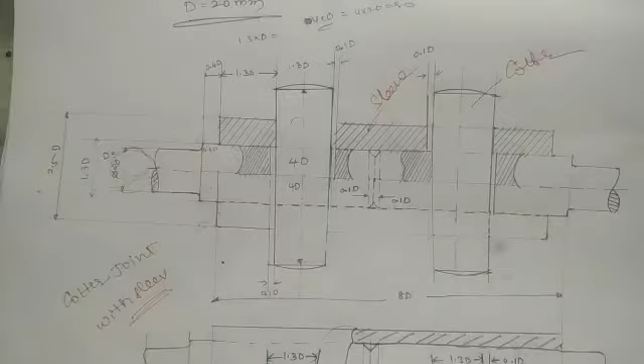This is the simplest of all Cotter joints used for fastening two circular rods, meaning the joining of two circular rods. This is the sleeve, these two are Cotters, and these two are circular rods.

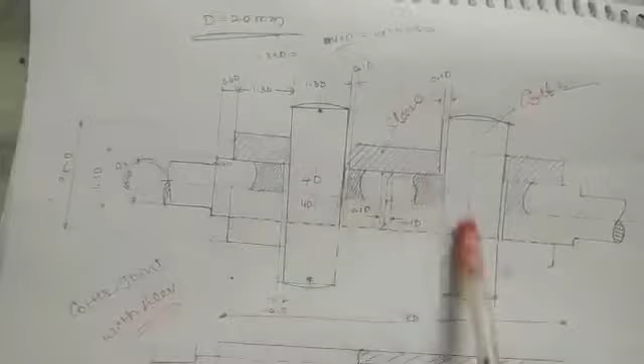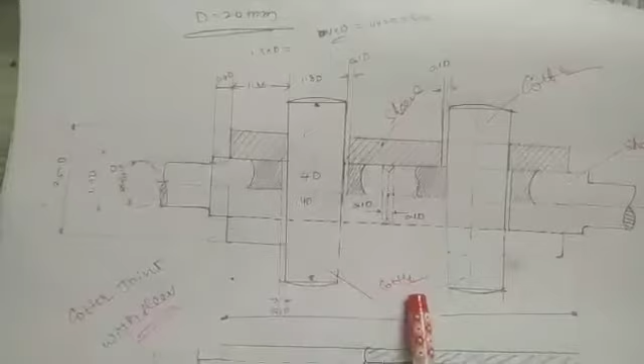In this Cotter joint with sleeve, we use two shafts, one sleeve, and two Cotters. The main purpose of the Cotter joint with sleeve is fastening two circular rods with the help of Cotters.

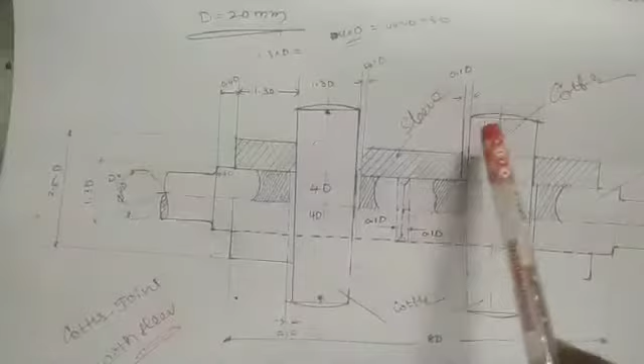Please see the diagram. These are all standard dimensions, meaning standard formulas. The rod diameter is D. From here to here is 1.3 into D. The sleeve outside diameter is 2.5 into D. The Cotter height equals 4 into D. The Cotter width at the top is 1.3 into D. The clearance dimension is 0.1 into D.

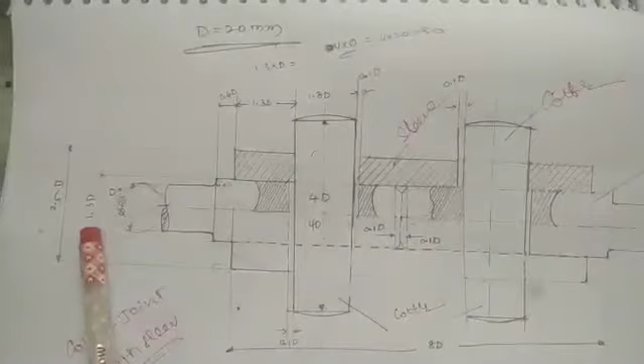In this case, I am taking D equal to 20 mm. Substitute this D value into all the formulas. So D equals 20 mm. This is 1.3 into D: 1.3 into 20 equals 26 mm. This is 2.5 into D: 2.5 into 20 equals 50 mm.

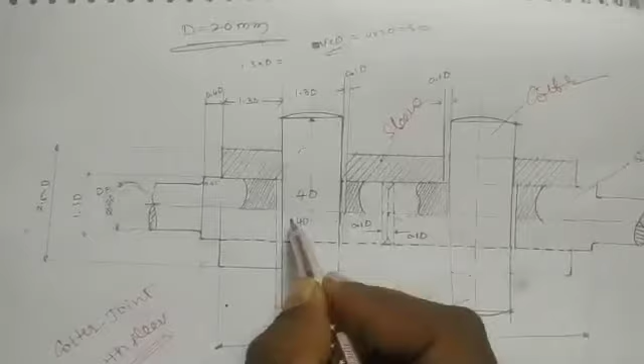But very important is how we start the diagram - that is very important. First of all, draw one center axis, which is very important, because without the center axis we can't do anything. After completing this, draw the 1.3 into D dimension line.

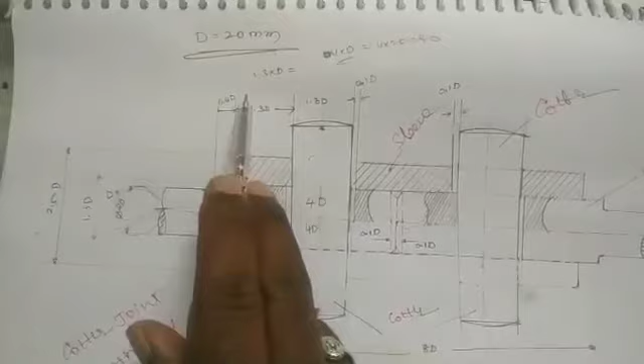After finishing this, take 0.4 into D dimension: 0.4 into 20 equals 8 mm. Take 8 mm from this point at the top, and again take 8 mm at the bottom. This is the symmetrical section.

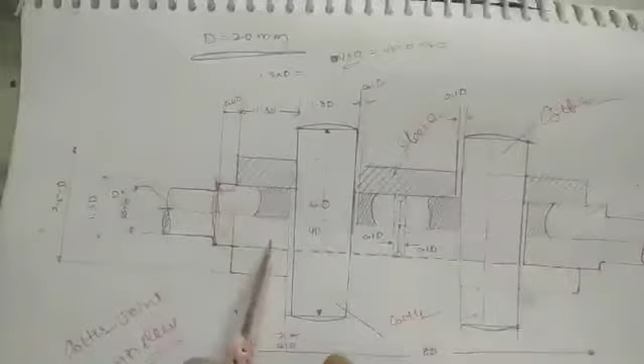After completing this, draw the sleeve portion at the top and bottom. The distance from here to here is 1.3 into D, so 1.3 into 20 mm equals 26 mm. Draw this portion.

Again take 1.3 into D, that means 1.3 into 20 equals 2.6 centimeters or 26 mm, for the Cotter portion. There is some taper section. Take 2 mm from this point and draw like this - some clearance is there.

The clearance dimension is 0.1 into D, that means 2 mm: 0.1 into 20 equals 2 mm. Take the clearance distance as 2 mm at the bottom and top.

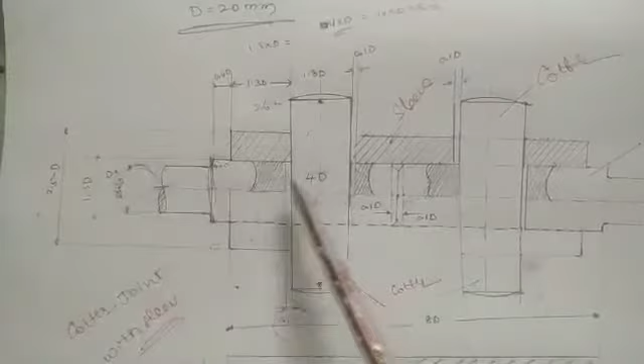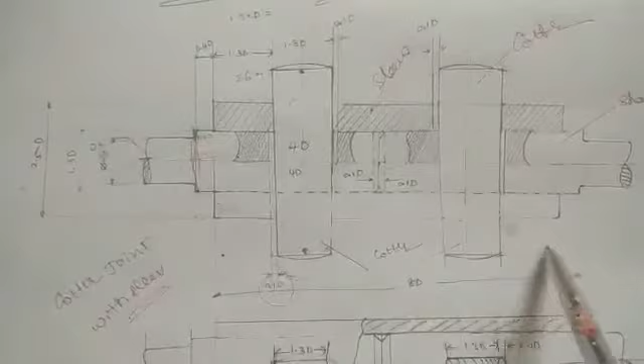In a similar way, draw the Cotter and this portion on the right side also. But very important is the total distance - before drawing this portion, you have to draw the total length: 8 into D, so 8 into 20 equals 160 mm or 16 centimeters.

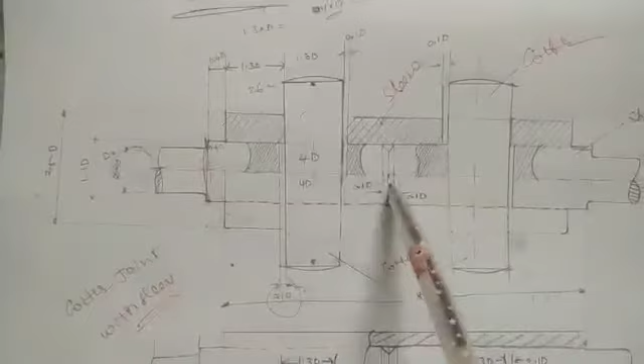Then you have to draw this portion. After completing this portion, draw this one, draw this one, draw this one. After completing this portion, draw the Cotter section, and after completing the two Cotter portions, draw the engagement of shaft portion.

This is 0.1 into D, then this is 0.1 into D also. This is the complete diagram of the Cotter joint with sleeve.

Very important point: you should also draw the top view. Project this one, project this one, project this one. This is very simple and easy to draw. Thank you. Draw the one center axis.

This is the center axis of the object in the diagram. Then draw one vertical line. The dimension of the vertical line is 1.3 into D, so D equals 20 mm. After completing that, draw one horizontal line.

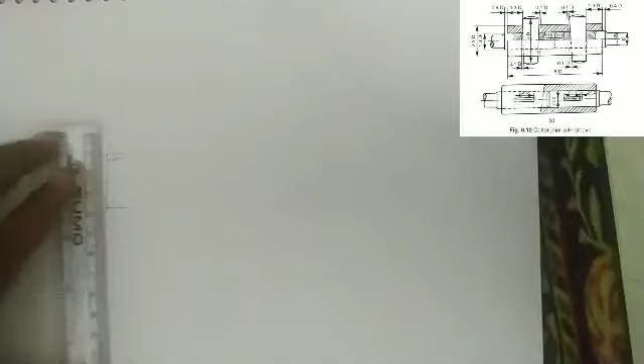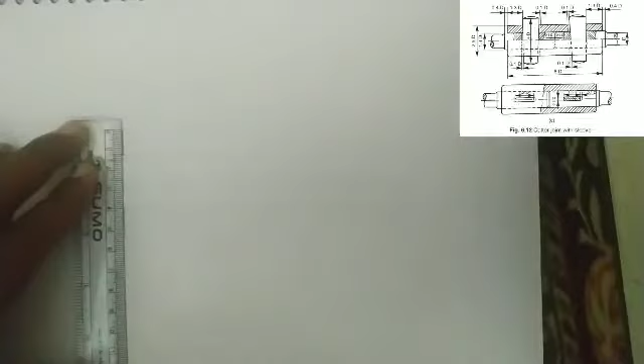This is the 0.4 into D dimension - substitute the D value into that formula. Then this is 1.3 into D. After completing these two lines, draw the 2.5 into D dimension. Please see the procedure how to draw this: 2.5 into D equals 20 mm, then 50. Take 25 mm above the center axis and again take 25 mm below the center axis. This is the symmetrical section.

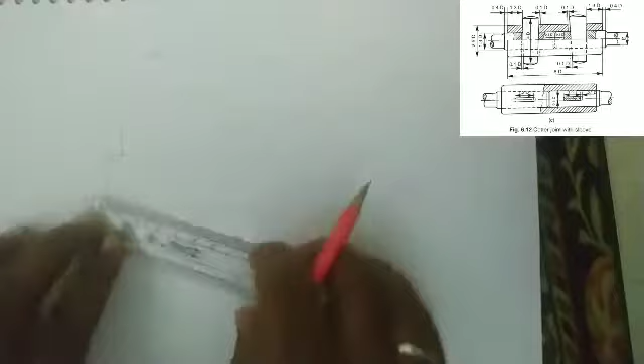After completing this, take the 1.3 into D formula: 1.3 into D equals 20, then 26 mm. Measure 26 mm with the help of a square scale. Mark one point - 26 mm, so this is 26 mm. Draw one vertical line at the top and bottom.

Please see the procedure how to draw the cotter joint with the sleeve. This is very easy to draw.

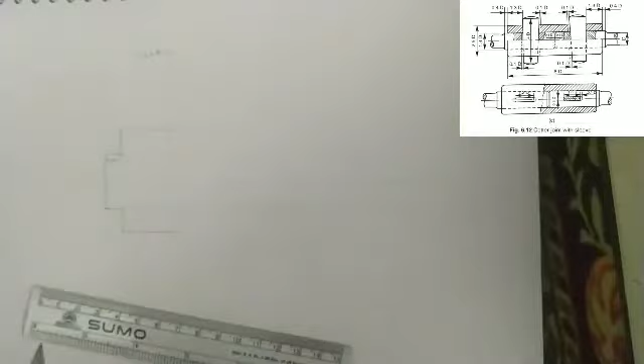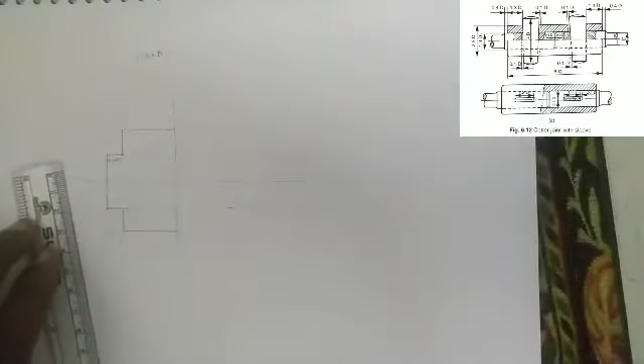Take 1.3 into D dimension, that means 26 mm, for the cotter portion. So please take 1.3 into 20 equal to 26 mm at the top and bottom. Draw one vertical line. So this is the cotter portion. Please see the procedure how to draw this cotter portion.

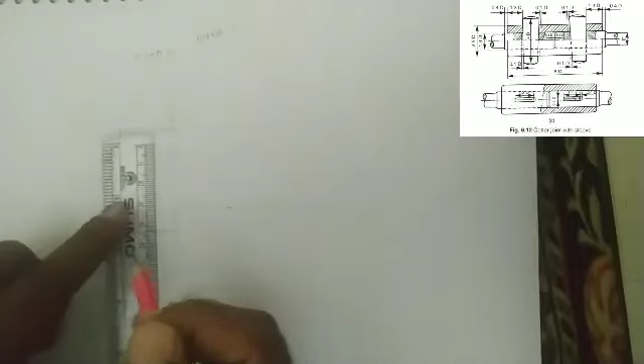The height of cotter equal to 4 into D. We know that D equal to 20 mm. So please substitute instead of D equal to 20. Then 4 into 20 equal to 80 mm. So the height of cotter equal to 80 mm. Please take 40 mm above the center axis, then again take 40 mm below the center axis.

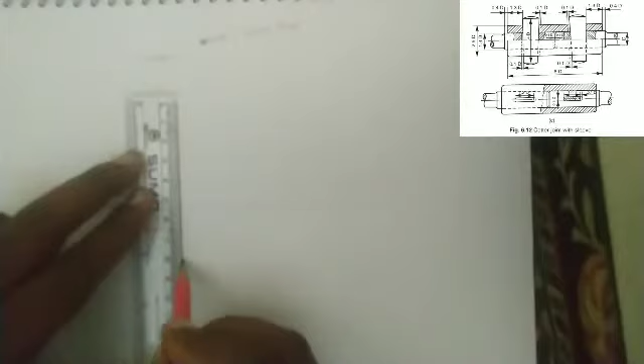Then this is the 4D, 4D means 80. So above the axis 40, then below the axis 40. So this is the symmetrical section.

From that line to this line, the distance is 1.3 into D, that means 26 mm. Then D equal to 20 mm, the diameter of the rod equal to 20 mm, or shaft.

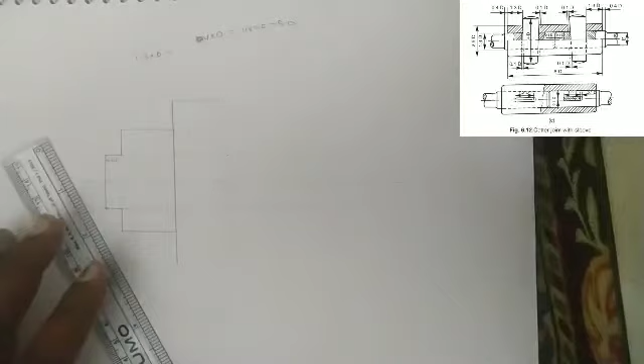Please see the procedure. The cotter has some taper section, so please take 2 mm and draw like this.

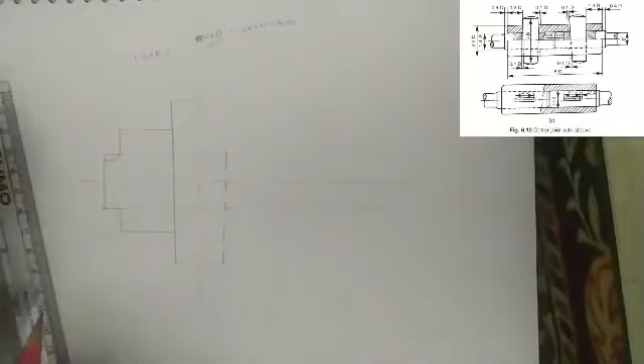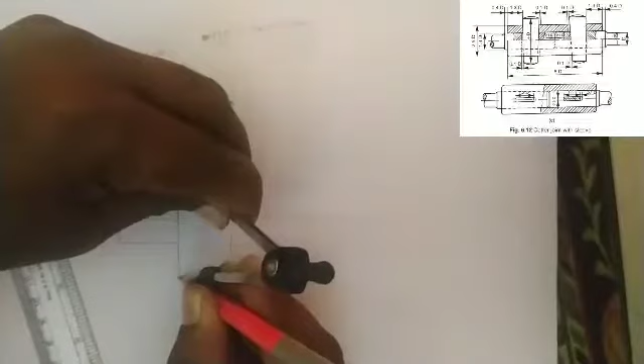Draw the arcs with the help of compass. Please take some radius as per your convenience, and draw the arcs like this.

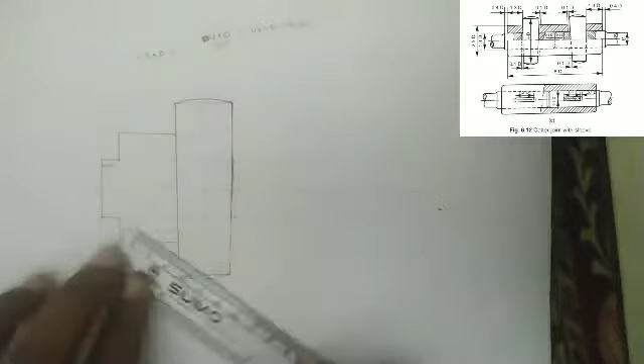Please draw some clearance, beside the cotters. Please take 2 mm and draw the clearance.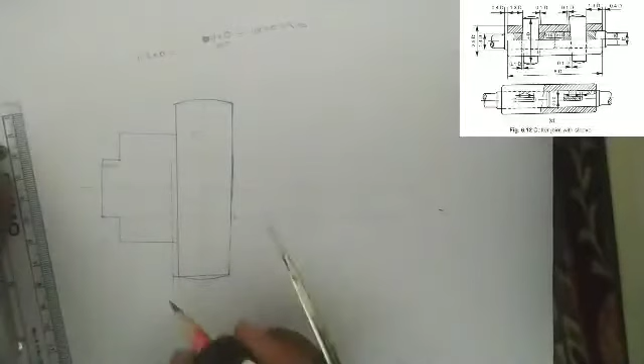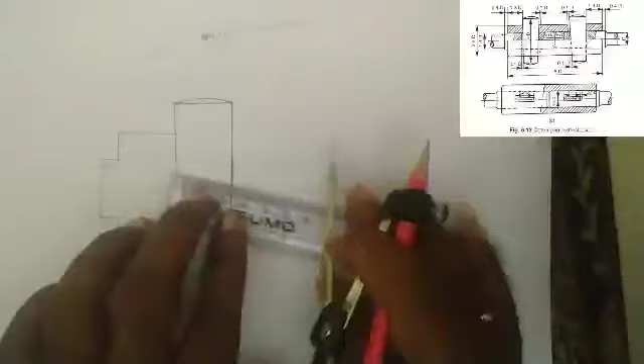The clearance formula is 0.1 into D, so 0.1 into 20 equal to 2 mm. Please take 0.1 into D at the top and bottom, then take 2 mm and draw the clearance.

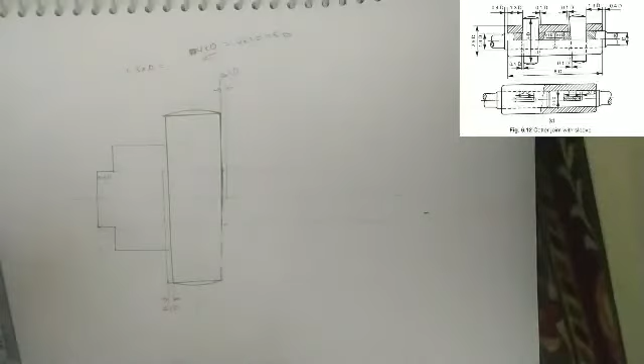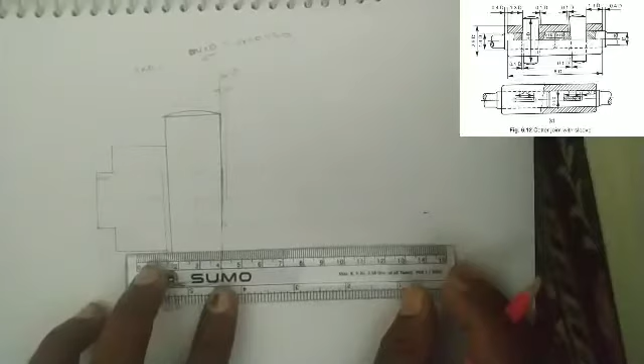The total length equal to 8 into D, so 8 into 20 equal to 160 mm. Please take 160 mm like this, that means 16 centimeter. Draw like this.

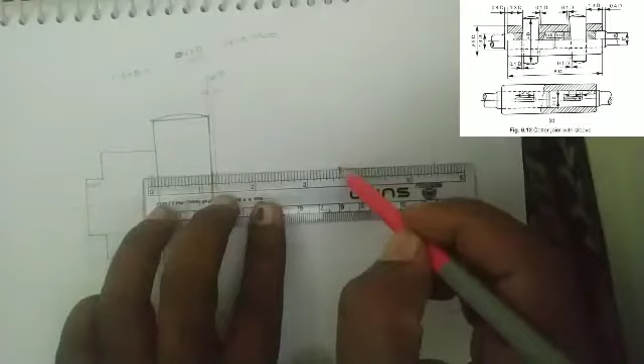Please see the 8D dimension on the real diagram. So the similar way, you have to draw the right side also. Follow the same procedure for the right side also.

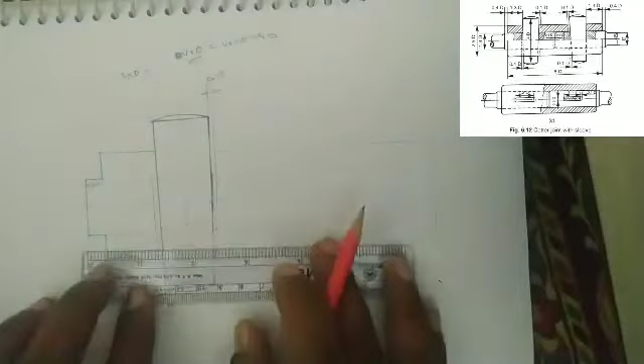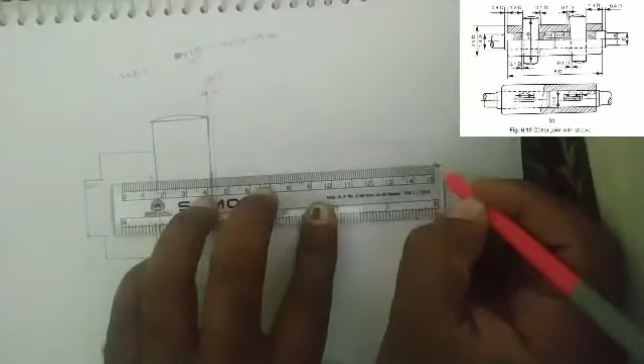Then again take the 0.4 into D formula, that means 8 mm, at the top and bottom. Draw the vertical lines.

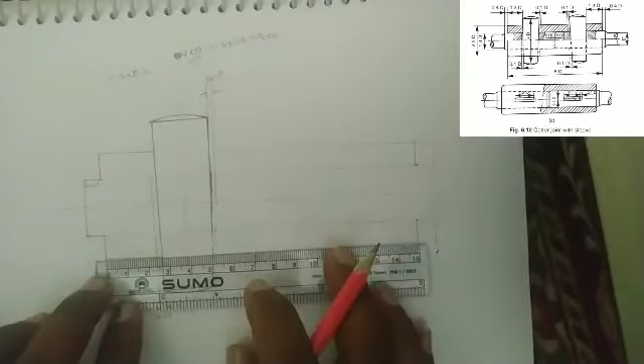Then take 1.3 into D formula, so 1.3 into 20 equal 26 mm from that point. Please measure the 26 mm from that point and mark one point at the top and bottom. Draw one vertical line.

You have to draw the cotter on the right side also. The cotter width equal to 1.3 into D at the top. So at the bottom some taper section is there.

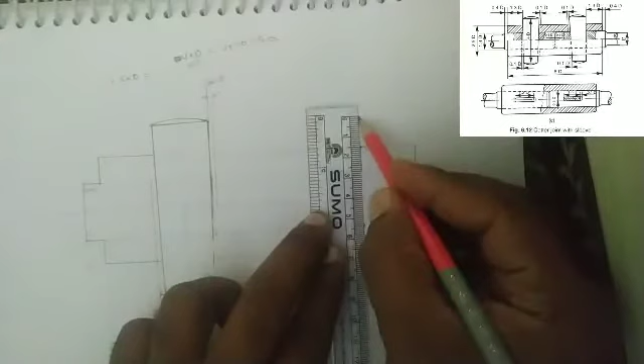It equal to 4D. Take 1.3 into D, so that means 26 mm, 1.3 into 20 equal 26 mm. So draw the cotter portion.

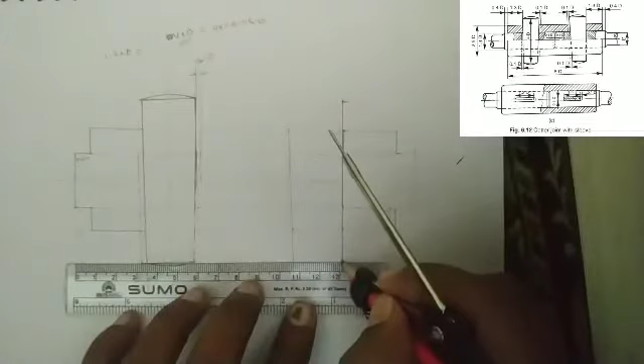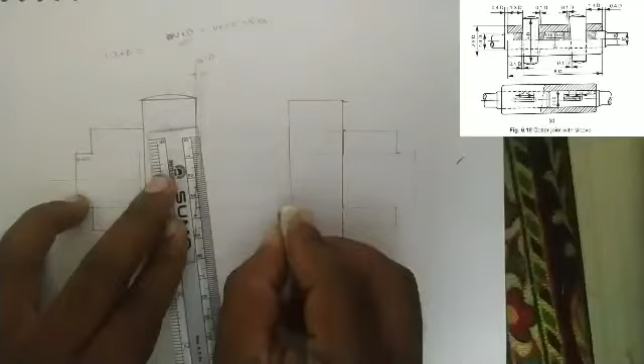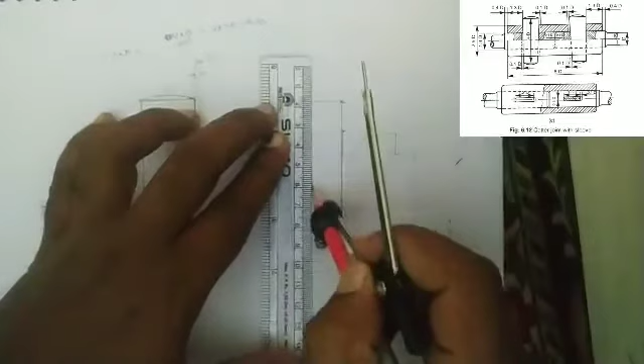Take 2 mm and draw like this. Take any convenient radius and draw like this.

Draw the clearance. Take 0.1 into D dimension, 0.1 into 20 equal to 2 mm. So take 2 mm, measure 2 mm and mark one point, draw like this.

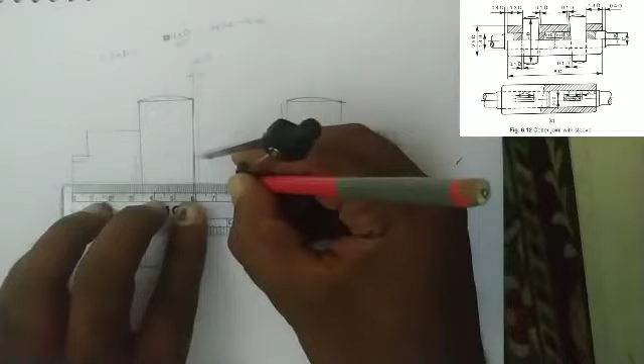Then take 0.1 into D dimension, left side and right side of that point, and draw like this. This section is the joining of two shafts. Draw the hatching lines for the sleeve portion.

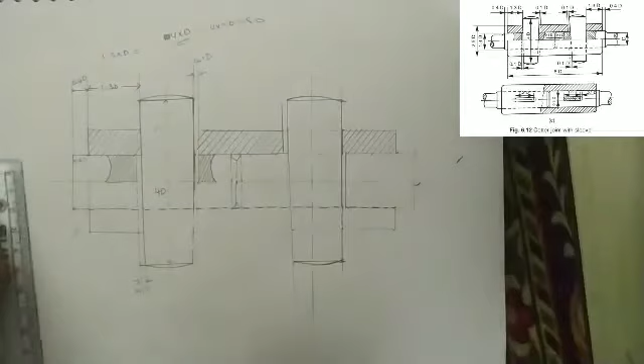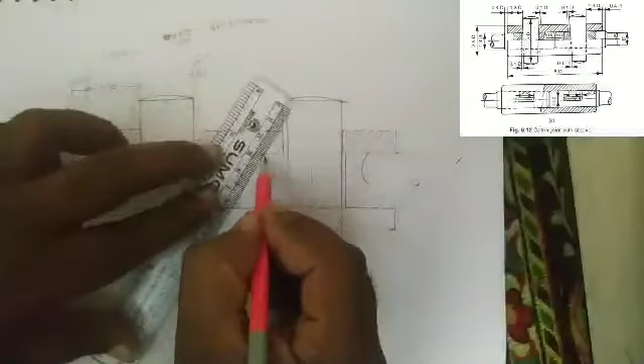0.4 into D. For hatching lines, take 45 degrees.

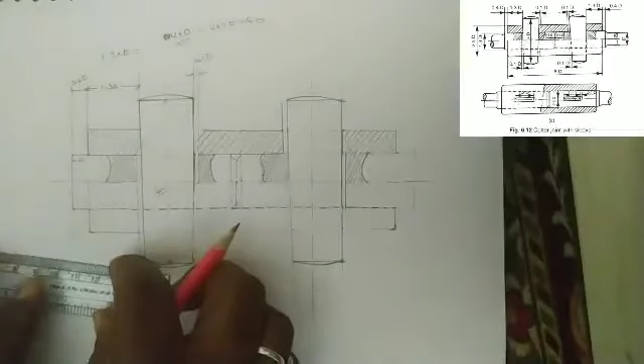Draw the rod diameter D. Draw the rod portion at the two ends. Draw the diameter D at the two ends.

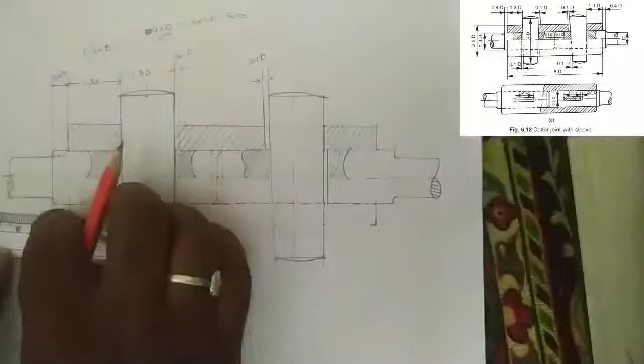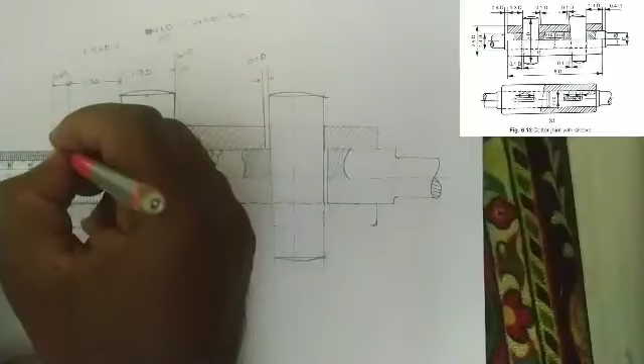D dimension. This is the 1.3 into D, so this is the 1.3 into D dimension. 1.3 into D.

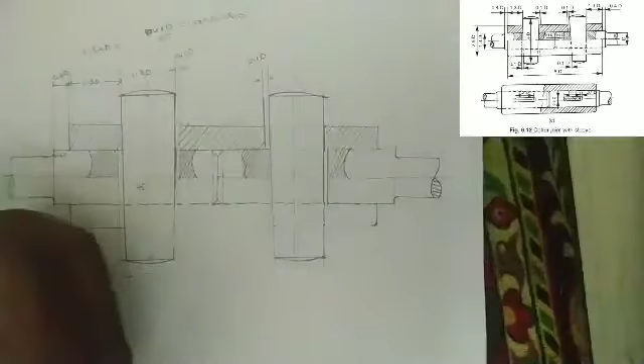So this one is 2.5 into D, from here to here, so 2.5 into D. D, 1.3 into D, then 2.5 into D.

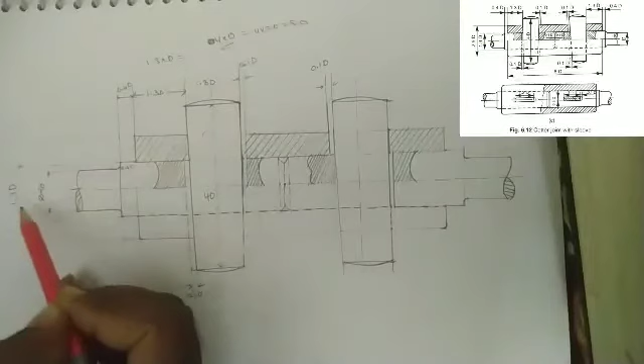So this is the complete diagram of cotter joint with the sleeve. So then D equal to 20 mm.

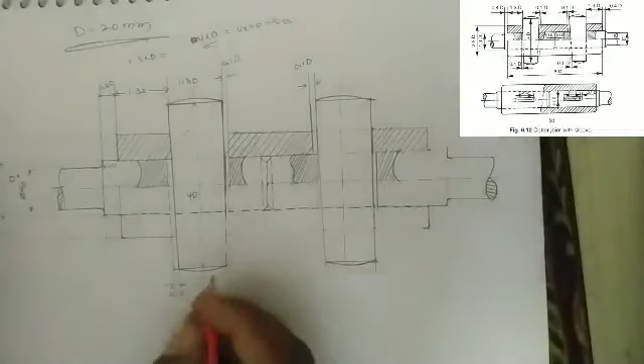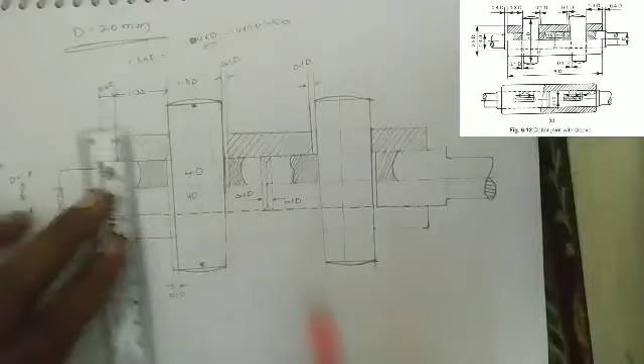So this is the 4D. Then this section is 0.1 into D and 0.1 into D. So 8D, the dimension from that line to this line is 8D.

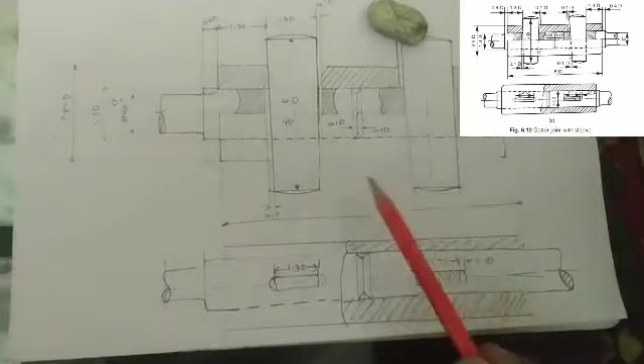So this is the complete diagram. You can also draw the top view, that means the bottom portion also. This is very easy to draw, just extend or project those lines. So we can easily draw this one, the bottom portion.